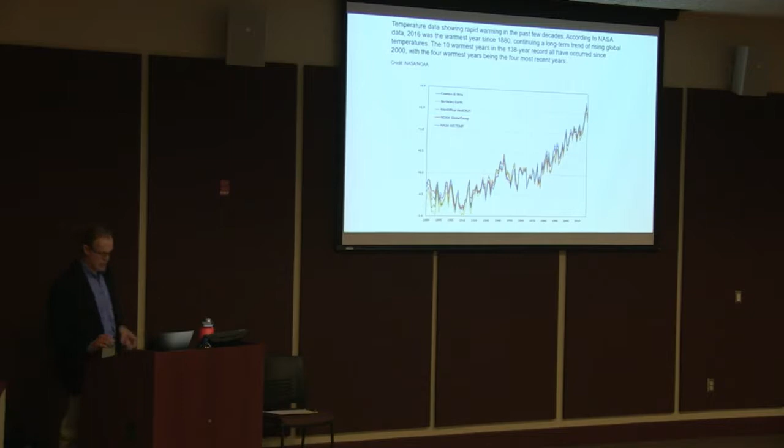This past November, Volume 2 of the 4th National Climate Assessment, called NCA4, was released by the United States Global Change Research Program. It focused on climate change, impacts, risks, and adaptations occurring in the United States. The report contains supporting evidence from 16 national level topic chapters, for example, water, oceans, energy, and human health, and 10 regional chapters and 2 chapters that focus on societal responses to climate change. The National Oceanic and Atmospheric Administration is one of 13 federal agencies that contributed significantly to the study.

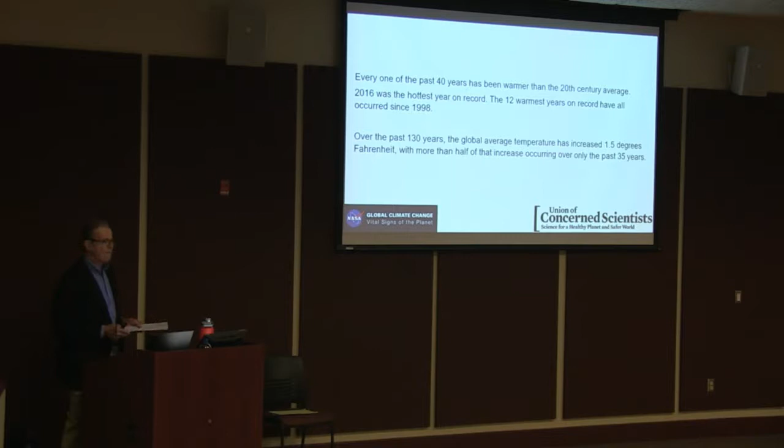In each of your packets, you should have received an additional resources page, and on the back of that page is a summary of the findings of the National Climate Assessment. And if you want to read the entire report, there is a link on there as well.

Ice losses from Antarctica have tripled since 2012, increasing global sea levels by 0.12 inches, which doesn't seem like a lot, but as I progress, I'll show you some examples where that is making a difference, and not in a good way.

This is an aerial photo taken in 2015 of a rift in the Larsen C Ice Shelf, which is the 4th largest ice shelf in Antarctica.

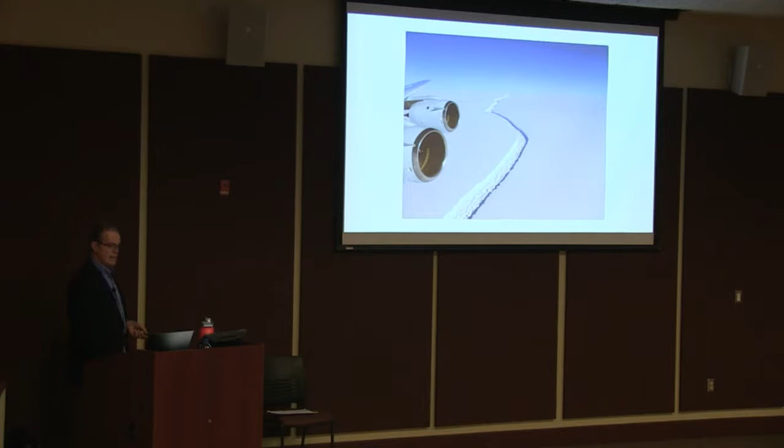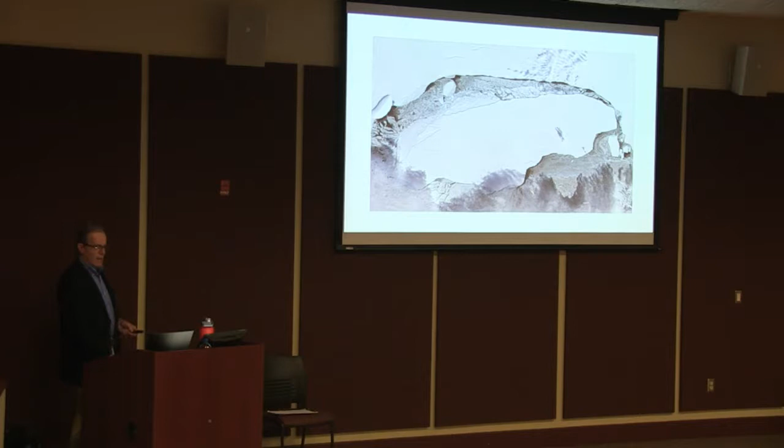Just 2 years later, in July of 2017, this section of 1,900 square miles, slightly larger than the state of Rhode Island, and 1,100 feet thick, broke completely off and separated entirely from the Larsen C Ice Shelf. It is now thought to be one of the largest icebergs ever.

Miami-Dade County, Florida. Sunny day flooding has become a regular occurrence in areas of Miami-Dade County. It's happening in other places too, like Charleston, South Carolina, and New York City.

This is not stormwater from a recent rainfall. This is seawater. It is corrosive, and it is causing damage to roadways, utilities, and it is contaminating the soil with salt water. It is having a negative impact on local economy and local businesses, and it's forcing kids to stay home from school.

So think of the Bay of Biscayne that borders all of Miami as a giant bathtub. It can only hold so much water. So during certain tidal events, water is being pushed up through the porous limestone because there's now an excess of water in the Bay of Biscayne.

That water is being pushed up through the porous limestone on which most of Miami is built, literally coming up through the ground and overwhelming storm drains.

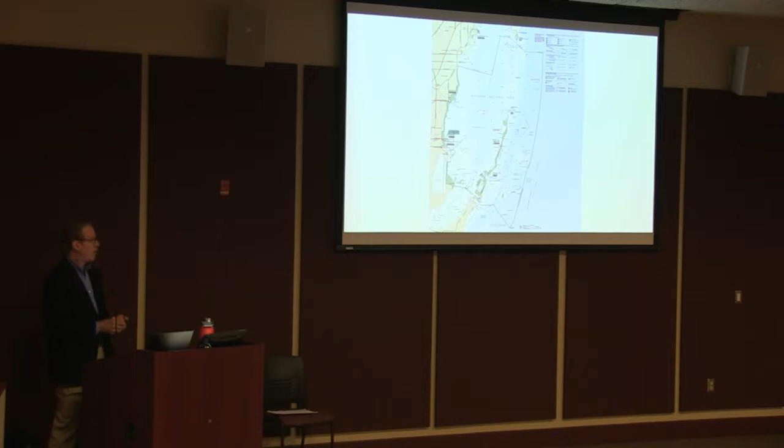So they've developed an ambitious, innovative, and extremely costly engineering effort to mitigate this problem. Over the course of the next 5 years or so, they're going to build 60 of these things in those low-lying areas that are prone to this sunny day flooding, to capture the water and pump it out before it builds up.

The problem is they're pumping it out in the ocean and it's just coming back in, eventually.

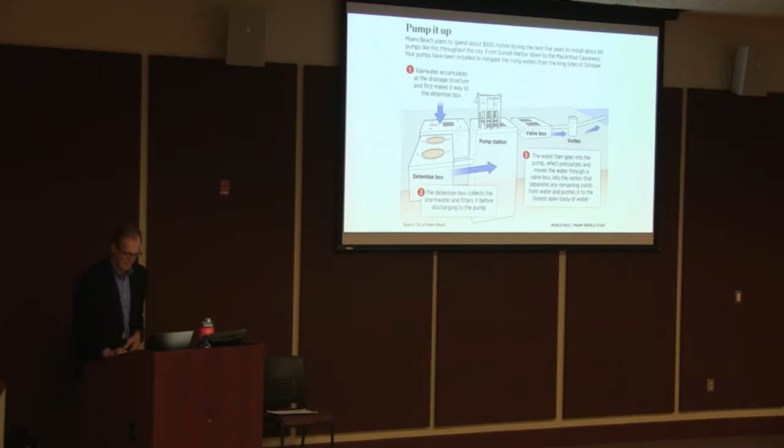This is Lake Austin in 2011. Austin, Texas. This is Lake Austin last November. In Austin, a major rainfall caused Lake Austin, Lake Travis, and Lady Bird Lake, the three main aquifers supplying the city of Austin with their water, to overflow their banks.

Stormwater runoff overwhelmed the lakes and dams, clogging their water treatment facility. This is actually silt. And this is obviously very silty too, but as it entered the water treatment plant, it completely clogged the facilities with silt.

Forcing a boil water mandate for a week, disrupting daily life and affecting countless businesses, bars, restaurants, University of Texas, and a lot of other entertainment venues.

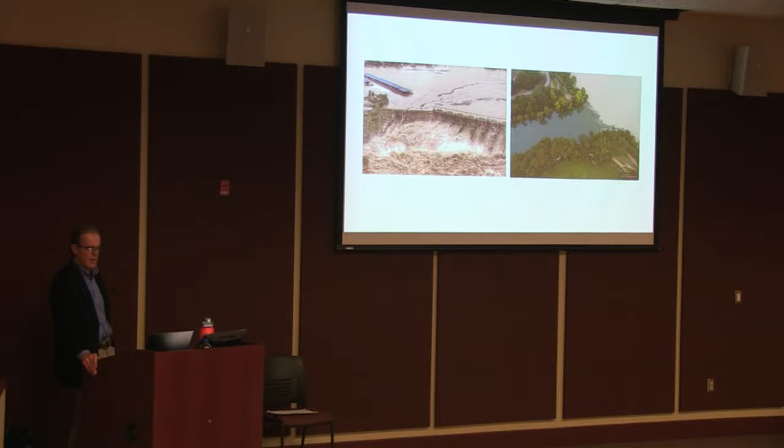Austin, Dallas, Houston, and many cities across the South have experienced double-digit growth in the past 2 decades. Stormwater runoff from overdevelopment is a significant source of flooding. Water infrastructure in growing communities simply can't keep up, and aging water infrastructure in older cities is crumbling.

The situation became so dire that the mayor of Cape Town initiated progressive levels of water rationing and was prepared to establish water rationing stations guarded by police and the military. Winter rainfall and the stringent rationing program that the citizens of Cape Town embraced averted potential disaster, but it still remains in crisis, a critical problem. They're not even up to close to half of their normal reservoir levels.

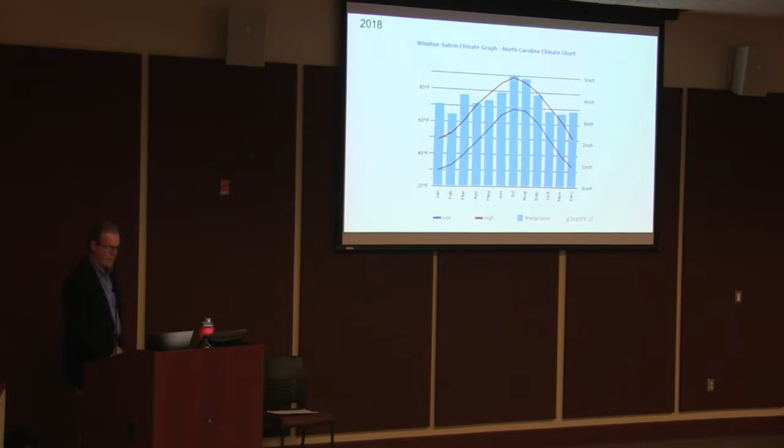However, in October of the same year, Stone Mountain Park opened Snow Mountain, a 400-foot tubing hill. They spent $5 million on this project, and on the first day, they blew 1.2 million gallons of water into the air, making artificial snow on an 80-degree day. Neither the snow nor Snow Mountain lasted very long.

In 2007, a theme park developer announced it was building an 80,000 square foot indoor water park, complete with a fly fishing pond, a sand beach, scuba diving and snorkeling lagoons, an indoor and outdoor wave pool, and a whitewater river for kayaking. 50 million gallons of water to initially fill it, and 60 to 100 million gallons of water per year to maintain it. It's crazy.

From 1895 to 2018, wildfires burned 35 million acres of land in California, which measures nearly 105 million acres. In the past 123 years, wildfires have burned the equivalent of 33% of the state of California. In the last two decades, 13% of the state has gone up in flames.

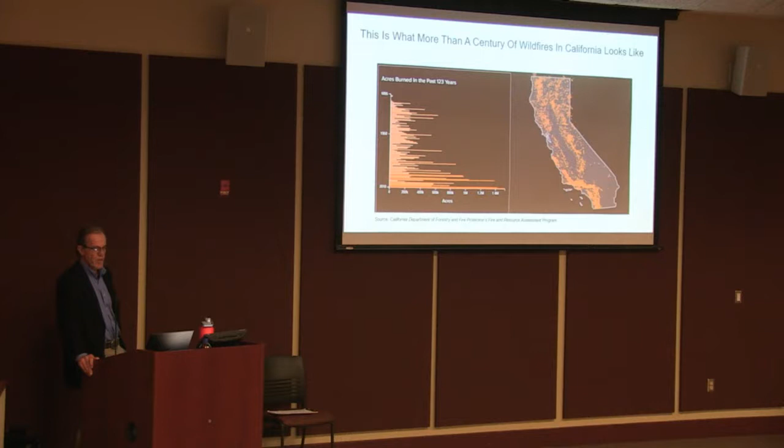Paradise, California, November 2018. This is the Camp Fire, described by many as a fire tornado, with high winds and incredibly hot fires.

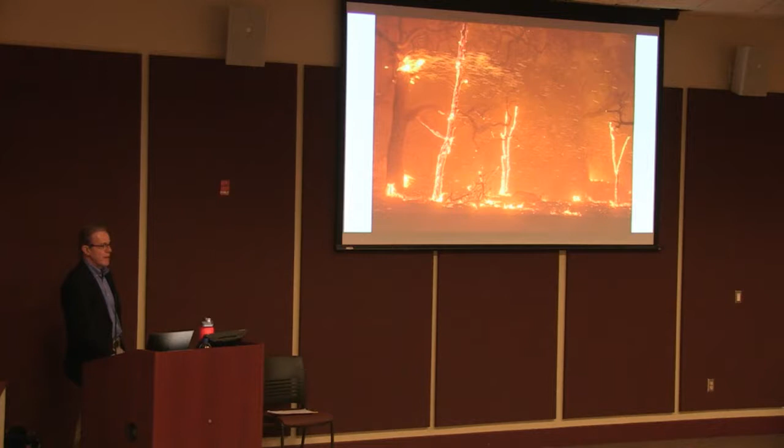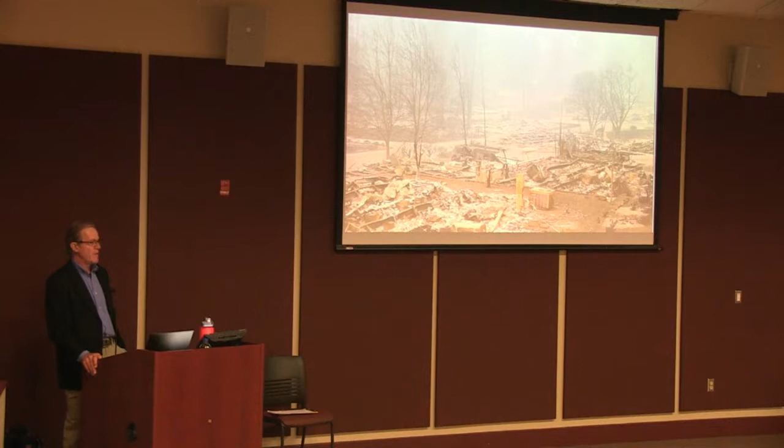90% of all the structures were destroyed in what was once called Paradise, a town of 26,000 residents. Everyone was affected, and almost everyone lost their homes and all their possessions. 86 people lost their lives.

So here's the hydrological cycle. We get rain, we complain about it, and we become apathetic when the sun comes out. And when it doesn't rain, we become aware, and then we become concerned, and then we panic, and the cycle continues.

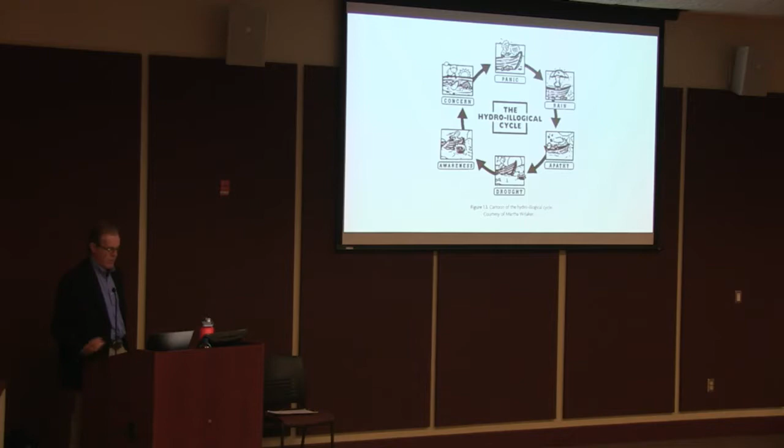So let's talk a lot about water infrastructure. With 71% of our planet made up of water, you'd think we'd have much more than we need. Of that water, though, only 2.5% is fresh water. And 5% of that 2.5% is actually in the Great Lakes, which, when I learned that, I was really surprised.

Anyway, of the 2.5% of fresh water on the planet, two-thirds is locked in ice caps and glaciers. Less than 0.3% of total fresh water on Earth is in liquid form on the surface of the Earth. The remainder is in permafrost, ground moisture, the bodies of plants and animals, and the atmosphere as vapor.

So when we understand how much fresh water is available to us, and in particular, clean, healthy water, it is literally a drop in a very large bucket.

So this is kind of fun. If you had a 10,000-gallon swimming pool in Winston-Salem, and you wanted to fill it with water, it would cost about $60. If you fill that same pool with bottled water from the grocery store, $10,000. $23,700 to fill it with soda, $35,000 to fill it with milk, $40,000 to fill it with gasoline, $100,000 to fill it with bottled beer, and $320,000 to fill it with one of our favorite brand name coffees.

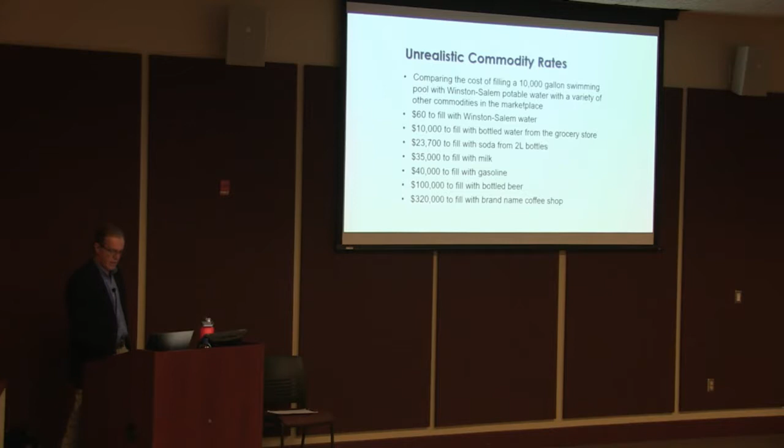And $2,200 to fill it with 40-pound bags of topsoil from Home Depot. Proof positive that water is in fact cheaper than dirt.

Yet with what seems to be an abundance of water, over 1 million people have to walk at least a mile each day to get their water for hydration, cooking, cleaning, and bathing. And many more millions have inadequate access to clean water.

Here in America and most other prosperous nations, we take it for granted that whenever we turn on our faucets, clean, healthy water will flow freely. And it's dirt cheap. My God, we even flush our toilets with drinking water. That's insane. We waste a lot of water.

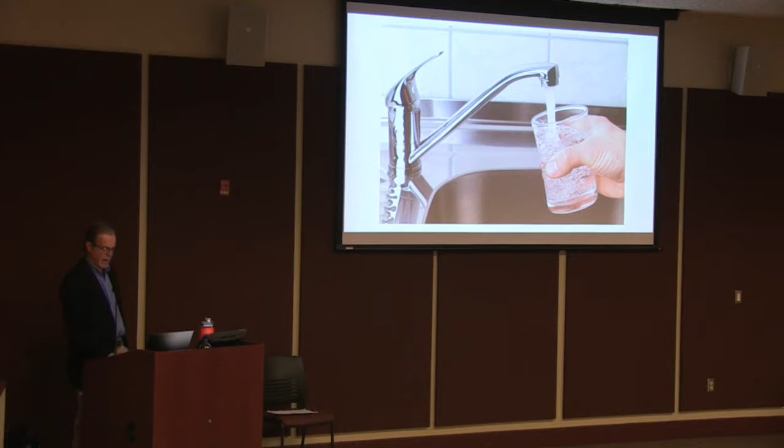So if you had a dripping faucet that dripped once every 10 seconds, over the course of a year you would lose 219 gallons of water. There's a high-end manufacturer of shower fixtures that offers a custom body spa, 10-jet shower tower that delivers 80 gallons of water per minute. That's enough to fill a common household bathtub in 1 minute. Crazy.

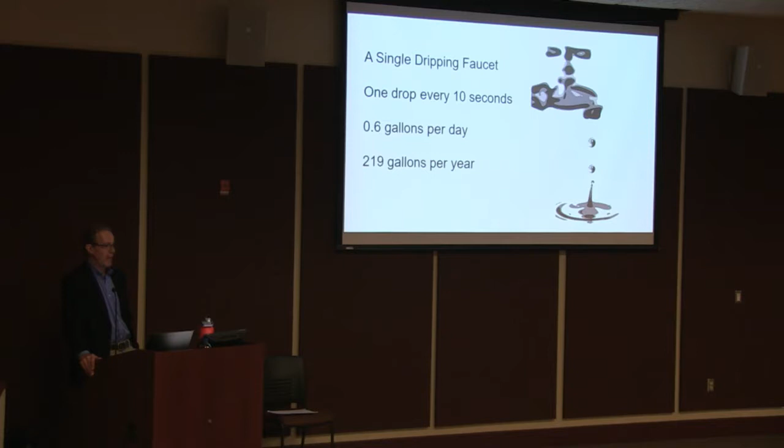So this is very common too. You would notice it if it was in your house, because like my mom's house, you would see water pooling up on the floor. But you wouldn't notice if it was the pipe leading to your house underground, or the pipe running down the street. But even a 1/32 of an inch pinhole over the course of a year, or three months, would, under pressure—60 psi being pretty much normal household pressure—waste 18,500 gallons.

Now imagine if that was an 18-inch water main running down your street at 150 psi, which is the normal operating pressure for most municipal water systems. You can pretty much triple those figures. By the way, leaking toilets are the primary source of residential water loss.

So there's a very simple way, if you're a homeowner and you have access to your water meter, which you should: make sure all your faucets are turned off and look at your water meter for 30 seconds to a minute. And if it moves at all, something's leaking. It could be the pipe from the meter to the house, or it could be something in your house.

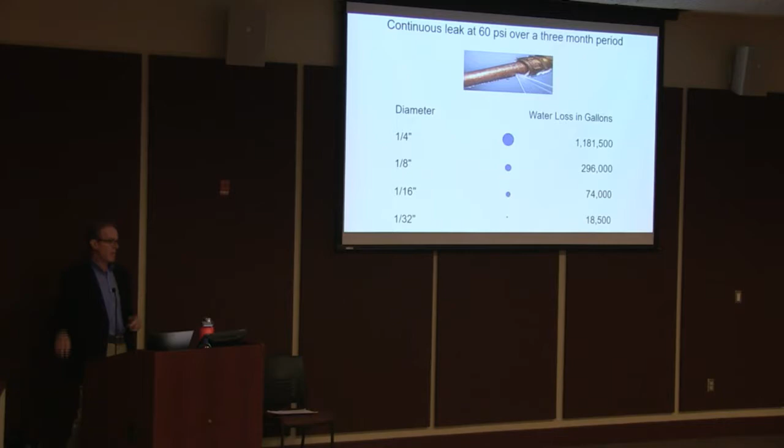This is a little off topic, but we take for granted how much water it takes in the aggregate process of making common everyday things we use or consume. It takes 3 gallons of water to produce a single sheet of paper, when you account for the rain, machinery, processing, and washing involved.

It takes 35 gallons to produce a cup of coffee, and 100 gallons to produce a potato. That may seem far-fetched, but it comes from a reliable source, the U.S. Department of the Interior. It takes 1,000 gallons to produce a pound of beef, when you account for all the water the cow drinks, the water that grows its food, and the processing of the meat.

This is an interesting calculator provided by the AWWA, the American Water Works Association. I plugged in Winston-Salem's approximate population for 2018. With conventional plumbing pipe transfer methods, PVC and ductile iron, the primary methods of water transfer in Winston-Salem's streets, between 29 and 32 million gallons of water are lost over the course of a year. Projected long-term, that's 1.6 billion gallons lost over 50 years.

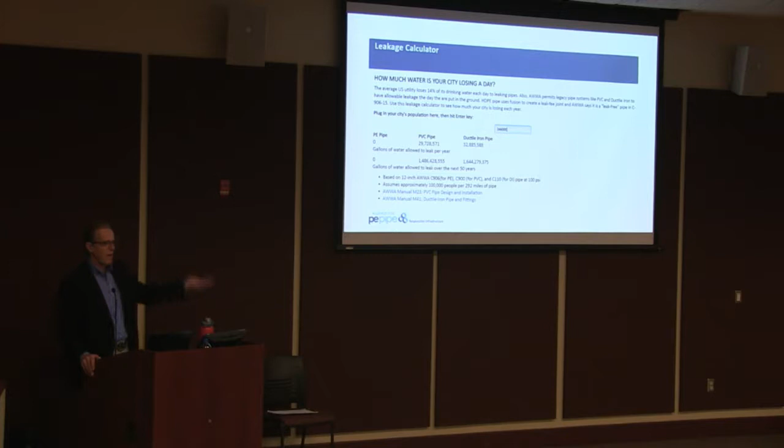At the UCLA campus in July 2014, a 30-inch, 90-year-old water main broke. Water pipe breaks and leaks occur several times a day in LA, a big city, and probably daily here too. But the UCLA break was extreme in part because of the line that pulls water down from the Stone Canyon Reservoir. When the line broke, water geysered at a rate of 75,000 gallons a minute, and over several hours they lost 15 million gallons of water.

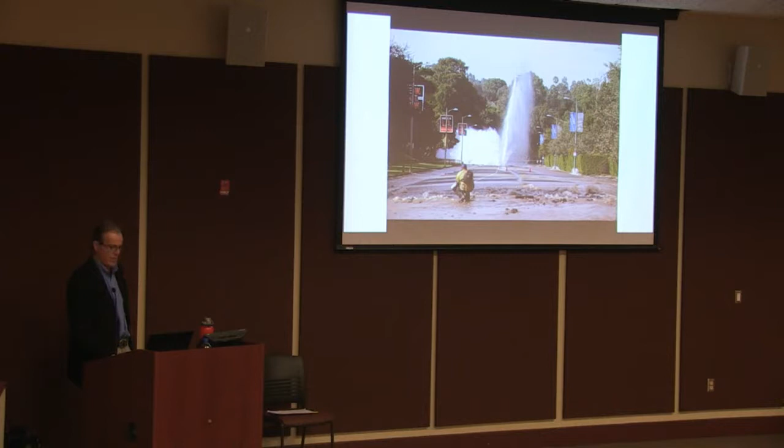This is the athletic complex that had been newly renovated. According to the LA Times, utility officials had warned in 2012 that 1 million feet of pipeline, or 20% of their system, had been in service for over 100 years and needed to be replaced. So the city, like many cities, is currently and very slowly swapping out the old lines, but at the current pace it will take at least 100 years to replace the entire system.

These are students being evacuated, and if you look, this is water cascading down a stairway, not a water feature. Department of Water and Power officials had hoped to secure a 5% water rate increase to fund infrastructure improvements, but the plan was dropped. The city of LA had to deploy swift water rescue teams and scuba gear into below-grade parking structures to make sure nobody was trapped in their car, since the cars were completely submerged.

Because of regular drought, Department of Water and Power customers have experienced an average 45% increase in overall water rates since 2012, but nearly all of the additional money is going toward purchasing water, not fixing pipes.

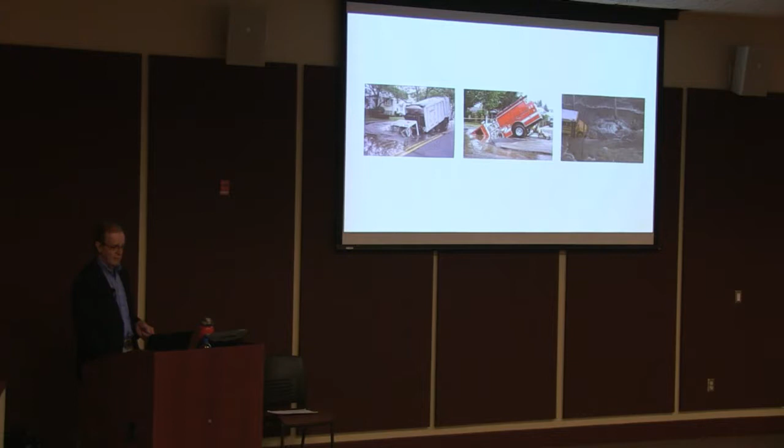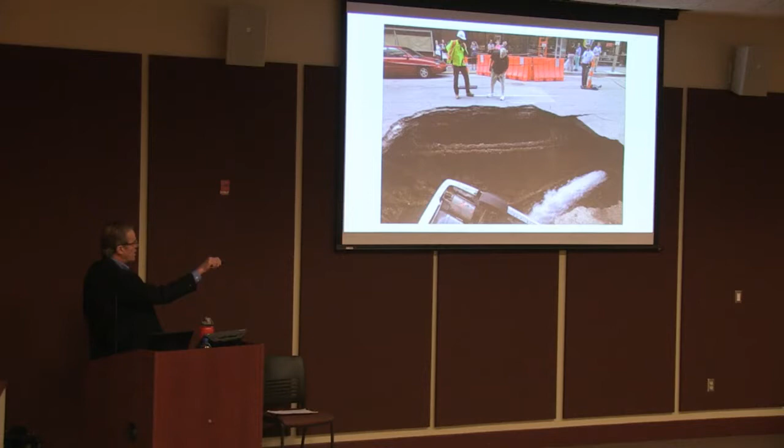We don't think so much about a garbage truck falling into a sinkhole. A fire truck would be bad, but a school bus would be really bad. This guy and his wife went to their health club on a Saturday morning in St. Louis, Missouri, parked their car on the street, and came back to find a water main leak had completely undermined the soil underneath the road—their car was now literally sinking into it.

So academics, scientists, municipal authorities, and engineers are regularly conspiring to come up with new sources of water. New dams, really expensive, and you displace a lot of people, flood a lot of land. River sharing, not really sure how effective that is, or even what it is. Rainwater harvesting, ambitious, good thing.

Think of new development, even existing shopping malls and strip malls. How much roofing there is at a Walmart and how much parking lot there is. That water's all going down the drain. It could be captured and used at least for irrigation or for flushing toilets.

Gray water is water that can be reused that's not pure. For example, if you had a gray water reclamation tank, a pump, and a filter at your home—this is really common in Texas now because of the drought—they collect that water and it filters through silt or diatomaceous earth. So it comes out clear, it's just not pure. You wouldn't want to drink it, but you can use it for flushing the toilet.

So the last one, icebergs. They were literally contemplating towing icebergs to help alleviate the drought situation in Cape Town, South Africa.

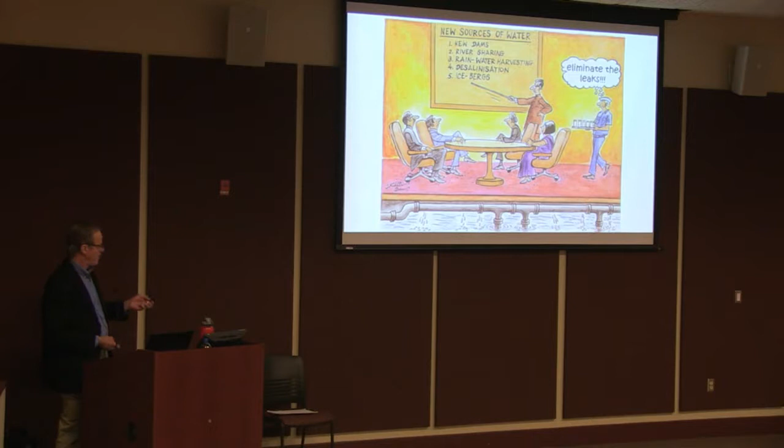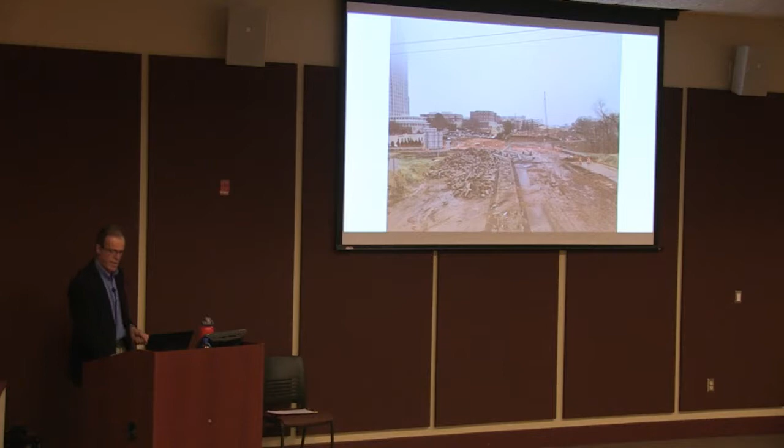Aging infrastructure right here in Winston-Salem. That, for those of you who haven't been around downtown lately, is Business 40. See the Wachovia building on the left. And a long overdue makeover for Business 40.

So I'm going to talk a little bit about materials. The evolution of water transfer started in ancient Rome, where they built aqueducts, canals, and even plumbing systems made of lead pipe, run through trenches, and that evolved to wood pipe. We've actually seen wood pipe excavated from areas in Washington, D.C., and it was very common in the early to mid-1800s.

It's basically like a barrel that's cylindrical. Clay was also really common up until about the early 1900s, maybe 1920s—very cheap, abundant, but also extremely brittle, and it comes apart.

Then cast iron, after the Industrial Revolution, became a big deal. Spun cast iron was even better.

Up until about 1970, asbestos cement pipe was very commonly used, mostly on the wastewater side, but also in drinking water. When the asbestos exposure issue became a big deal, everybody kind of freaked out. Asbestos in pipe, if there's drinking water running through it, isn't really an issue—it's only an issue when it's what's called a friable material. So if you crush it, it releases powder into the air, and if you breathe that in, that's a problem. But the EPA and the FDA said no more asbestos cement pipe. There's still a ton of it in the ground, though.

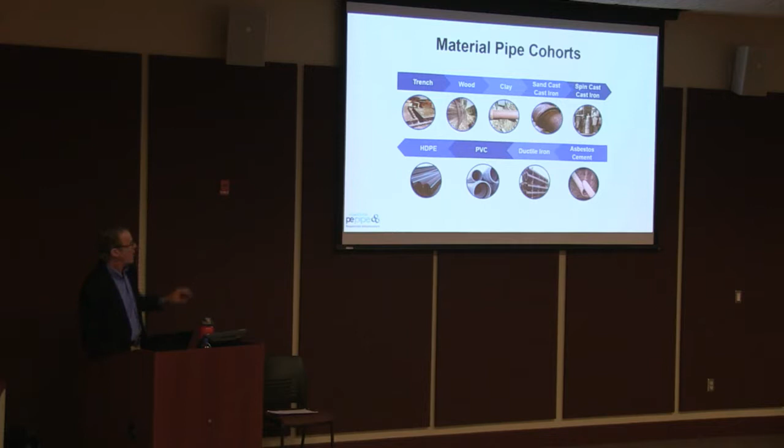So all the other pipes we just looked at are known as bell and spigot. There's a bell, so a wide end on one end of the pipe and a narrow end on the other, and they come together and are pressed together. There's either an internal seal in there, or they're glued, or they're packed with something called oakum.

In the olden days, cast iron and a lot of ductile iron pipe was packed with oakum. The problem is that when those pipes are pressurized, eventually over long periods of time, that sealant gets blown out.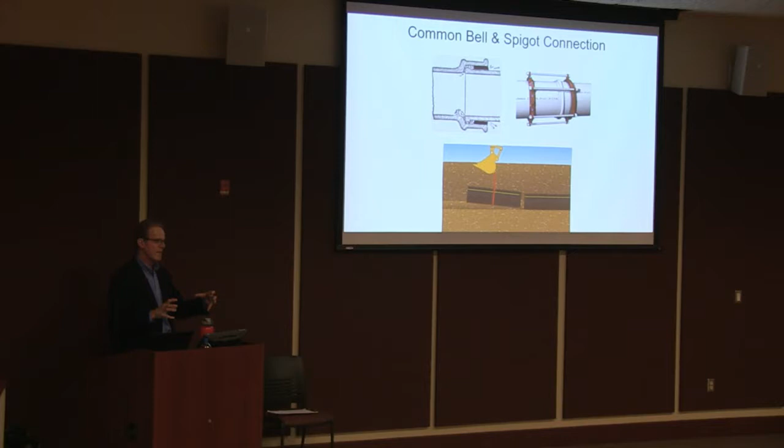The other thing too is with any kind of bell and spigot installation—whether it's cast iron, ductile iron, PVC, or cement pipe—it's put together in the trench. You see these gigantic pieces of cement pipe, primarily used for wastewater, that weigh over 1,000 pounds. You get them down in a trench and have to push them together. There's going to be dirt, rock, and gravel that gets in, so they're never going to properly seal. And over time, with shifting soil, they can pull apart and start leaking. And then cars start falling into the street.

By the way, this pipe in particular was a water main - when you opened your tap, that water was coming out of it.

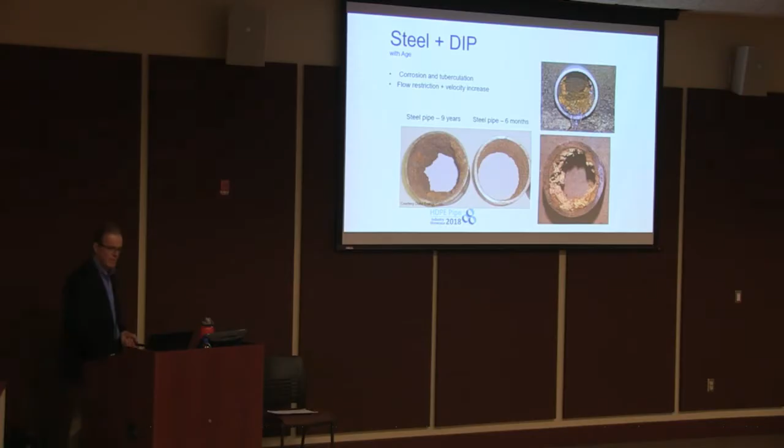So this pipe on top was excavated in East Windsor, New Jersey, near Princeton. It had been in the ground for 10 years. That's ductile iron pipe. Now, there's nothing wrong with ductile iron, but when you bury it in the ground, especially in corrosive soil, this can happen in 10 years. Plus, any iron or steel pipe will corrode and rust from the inside out and from the outside in.

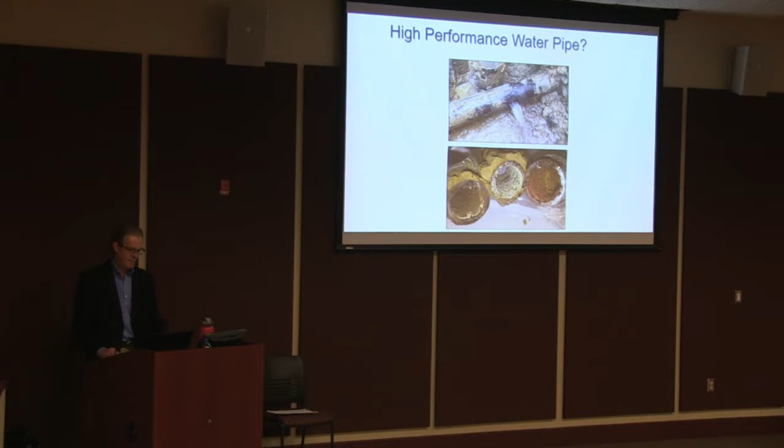Which is the ability to withstand ground movement from freeze-thaw cycles like we get in northern climates and in the Arctic, and shifting soil conditions due to drought and flooding, and earthquakes.

I know in the Houston area, they went for about 4 years into extreme drought, where they were having maybe 3 to 4 inches a year of rain. So the soil became like concrete.

And then in the spring of 2016, they had what's known as a 500-year flood event, the kind of flood that would only happen once every 500 years. It had 24 inches of rain in 36 hours. And it overwhelmed their sewer system and the stormwater drainage system. But eventually, all that water did seep into the soil, so that concrete soil became sand.

And all those pipes in their water system, both water mains and sewer lines, broke apart - thousands of them. They're replacing 50 miles of pipe in their municipal water system every year. 50 miles.

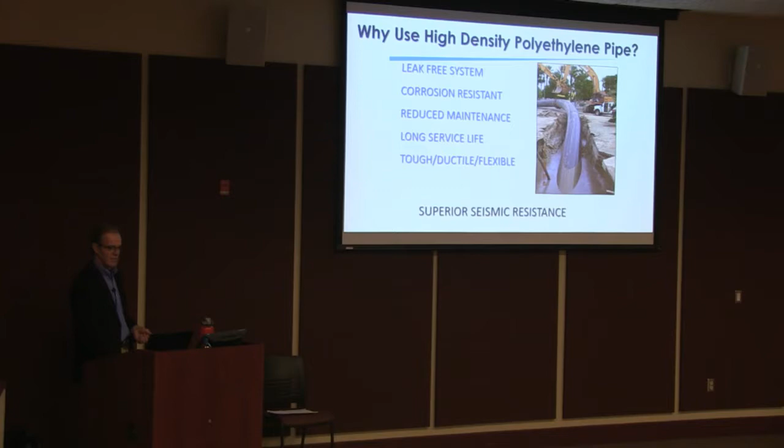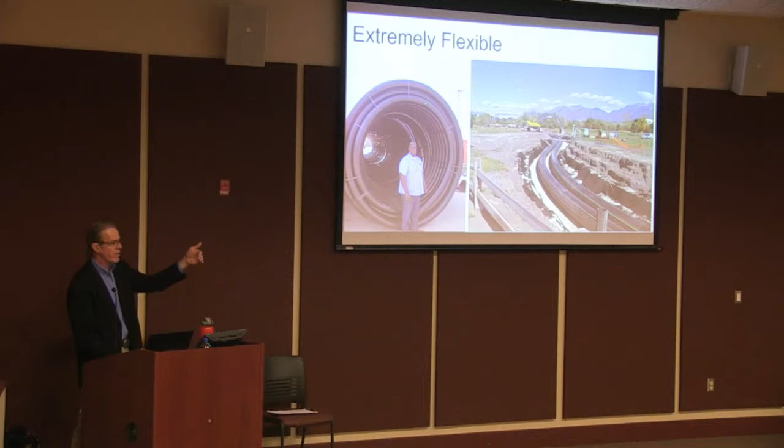So when the pipe is made, it has memory, and it can be bent around corners. In conventional materials like ductile iron or PVC, you would have to put 20 degree, 30 degree, or 45 degree connectors in that trench.

When a water main is leaking, even at a slow rate or a rapid rate, it's not a good thing, but ultimately it's going to undermine the street and need to be repaired. But when there's a gas main leak, people can die. So they carry these things on their truck - it's hydraulic, basically a pincher. It's like taking a vice grip wrench on a garden hose, completely stopping that flow of gas immediately, fixing the breach, and then they bring that up real slow, and the pipe comes back to its normal shape.

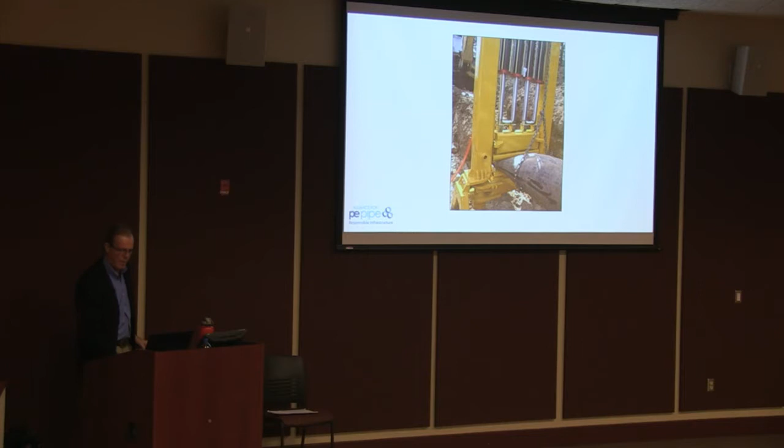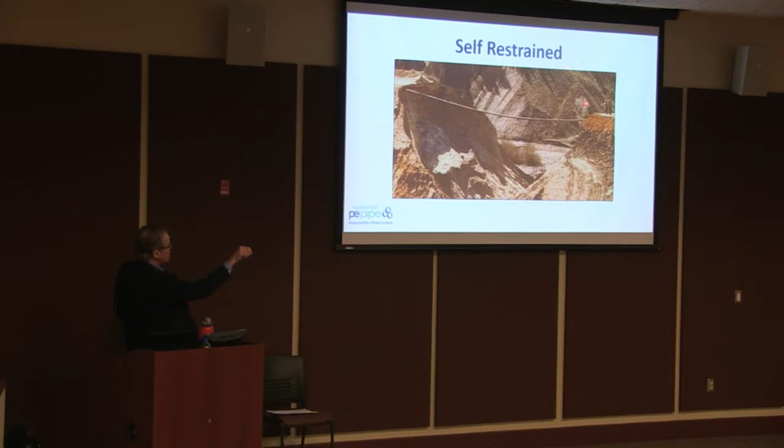So this is a mass wasting at a copper mine in Utah. Several thousand tons of earth washed away in a matter of seconds. You can see the river over here - so this was all earth. And there was an 18-inch fire line about 36 inches deep, buried underground. And when that mass wasting occurred, you can see two guys standing up here - the line did not fail, and it was still carrying water.

Now, you wouldn't want to leave it that way, but it's a really good example of the resiliency and strength of this material.

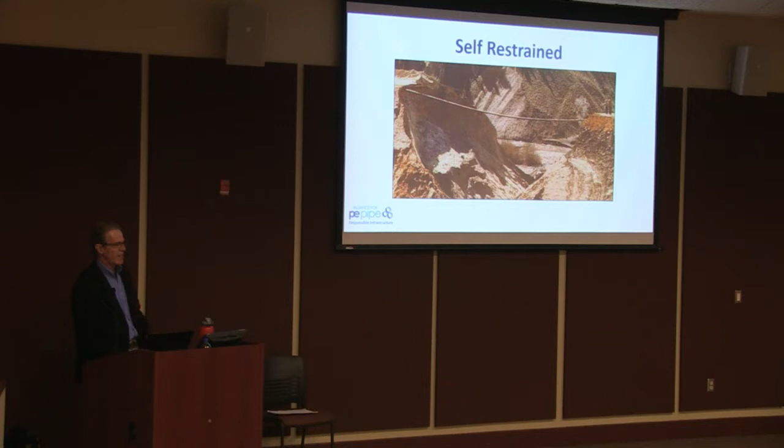We use high density, medium density, and low density polyethylene in our daily lives - milk containers, juice bottles, yogurt containers, detergent and bleach bottles. It's all made of polyethylene. So it's safe, and it's approved by the FDA, the National Sanitation Foundation, American Society of Testing and Materials. It's safe. We use it every day.

NSF 61 is the toxicological standard that's established for all pipes and water transfer systems for drinking water. Go to Home Depot and buy muriatic acid, Drano - highly corrosive, highly caustic liquids - it's sold in polyethylene. Again, testament to the fact that it doesn't corrode, and you're not going to have an issue with it when you're running water through pipes that are sometimes 3 inches thick.

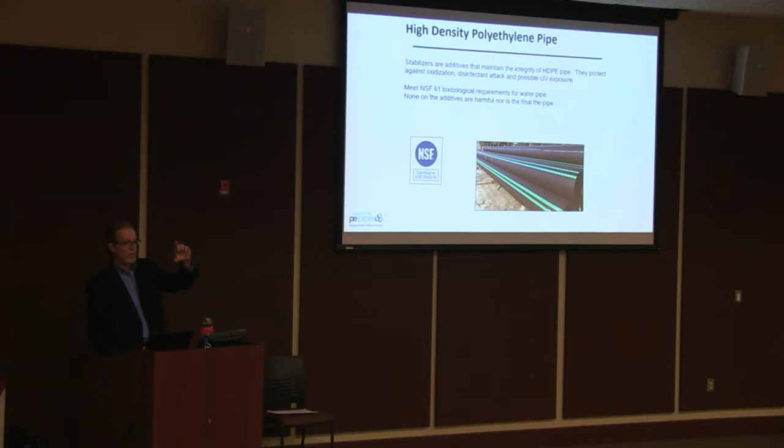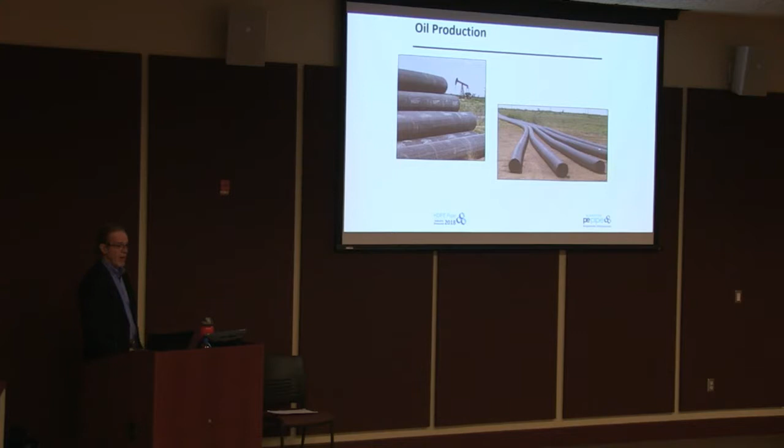So here's some applications. Nuclear, again, it doesn't leak, it doesn't break, and that's a huge issue in many industries, particularly nuclear. Oil production, because a lot of times when they're at the oil fields, they can just lay the pipe out on the ground and then move it, drag it to another spot. Mining, very commonly used in mining now, again, mostly because it's flexible.

Marine applications, this is really cool. So the picture on the left, that's an example of at the Nashville Airport, Cornell University, Boise, Idaho, and several other cities around the country are submerging polyethylene pipe into the bottom of lakes. So you get below maybe 15 feet, and the water's about 50 degrees, between 40 and 50 degrees. And they're pulling, Toronto's doing it too. They're pulling that cold water through heat exchangers, basically a giant radiator that you would see on a truck. So it's got a series of tubes and a fan, and they're blowing it into buildings to air condition. They're doing it at about half the cost of just regular HVAC systems that run on electricity.

This other picture, you can't really tell very much, and I'd love to go into more detail about it, but I don't have enough time. This is part of the ocean cleanup project. Has anybody heard about that or seen it? All right, so they're taking a 36-inch, Sean, you have. They're taking, I think it's a 36-inch or 48-inch, about a 2,000-foot long piece of high-density polyethylene pipe that has a drape hanging from it. And I'm not sure, it's some kind of a super strong plastic curtain that extends down about 9 meters, I think. And because of the way they've designed it, it goes into a natural horseshoe, and their objective is to take it out to the North Pacific subtropical gyre, which is the garbage patch, which is a topic for another discussion. I could spend all day talking about that because I've studied it.

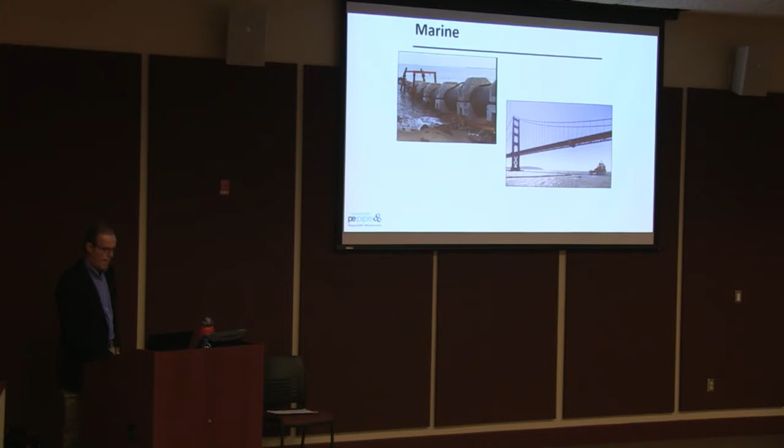Yeah, they're using high-density polyethylene pipe. Both ends are sealed, so it floats. But even if the ends weren't sealed, it still floats. So that's why they have to put those concrete collars on it for the shore projects. Landfill, great application for it as well because it lasts indefinitely, flexible, non-corrosive, and it's easy to move around if they need to.

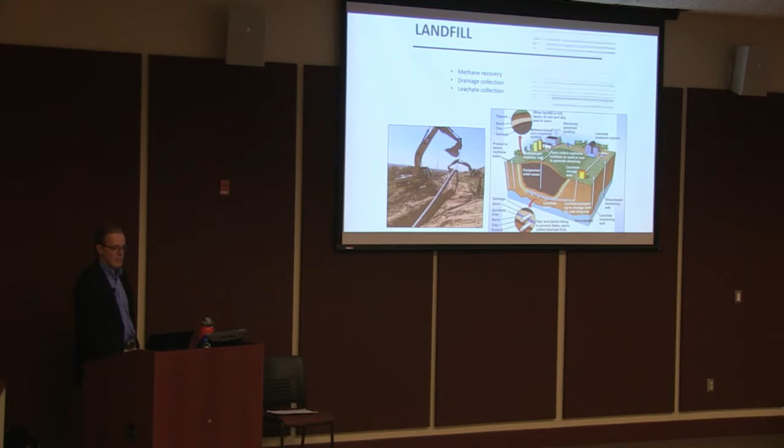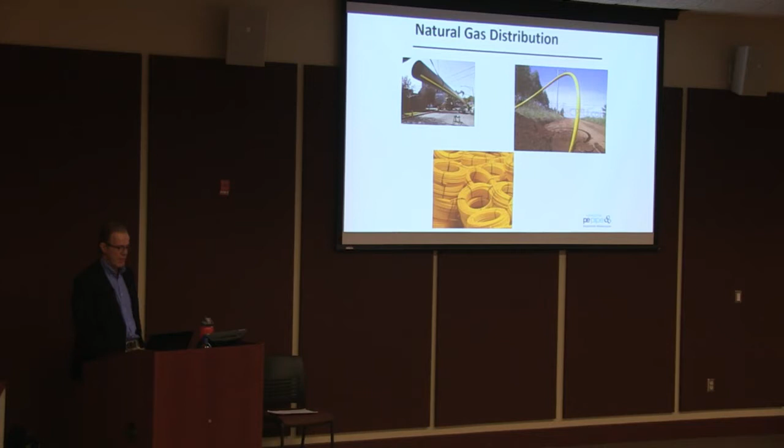Industry, natural gas is the standard now. Most natural gas companies and installers don't use anything but polyethylene pipe. This is actually medium density, but again, as I explained before, it doesn't leak, so it's not going to blow up. Water, of course, wastewater.

Google, Apple, Tesla have all used high-density polyethylene pipe to build their new campuses. So if you've seen these campuses, they're huge. So all their water mains and water supply are now using high-density polyethylene pipe. Again, it doesn't leak.

So this is cool. There's a brewery in Belgium where they had to transport 12,000 bottles per minute of beer via trucks. Their production facility was producing 12,000 bottles per minute. They had to transfer that beer from the brewery to the bottling plant, and they were running over the streets of this town, the ancient cobblestone streets, and tearing up the roads. And the mayor didn't like that, so they built a beer main. I'll show you in a minute how they do that without digging up the street.

So this just shows you how the pipe is made. It's called extrusion, molten resin that's highly engineered specifically for high-density polyethylene pipe. It's pushed through a die in molten form, and then it goes through a series of chambers that are internal vacuum systems that keep the pipe from collapsing on itself. And these larger diameters, they run 50 feet just because they can't be longer for transit purposes to put on a truck. But you saw that picture of the guy earlier, 500-foot rolls of 6-inch and 1,000-foot rolls of 2-inch.

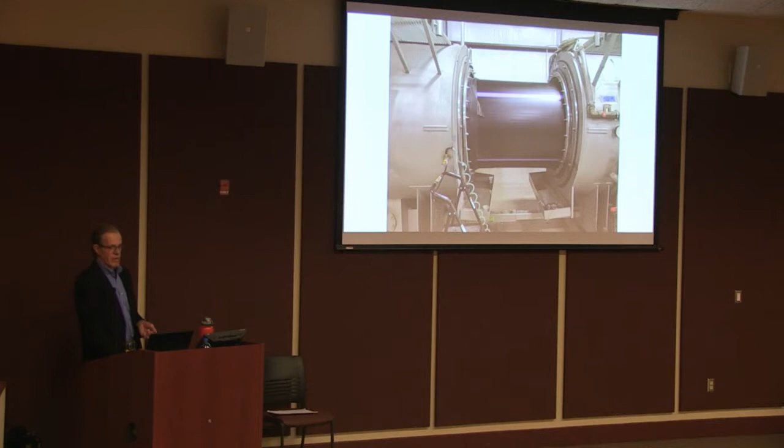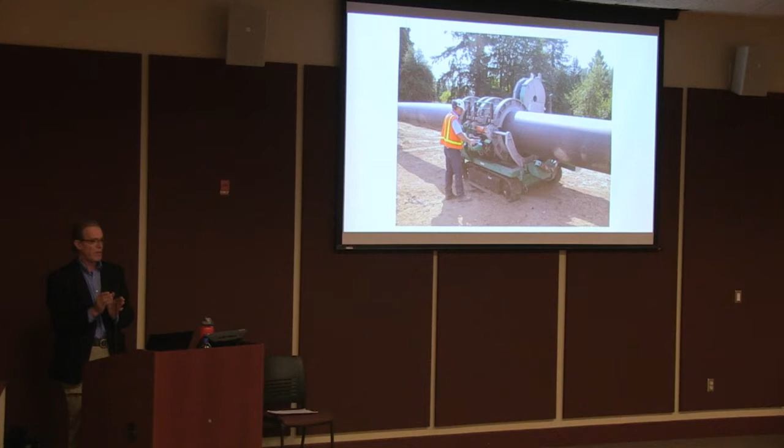So the process then is the pipe is put into this machine. It's clamped in. This plate lowers down, and it has blades on both sides. It cleans the ends of the pipe and squares them up, and that's pulled back. And then there's another plate that's a heater plate. Heats the ends of the pipes to 420 degrees, and then they're pressed together under pressure, like so.

Whoops. Doesn't want me to play it. There we go.

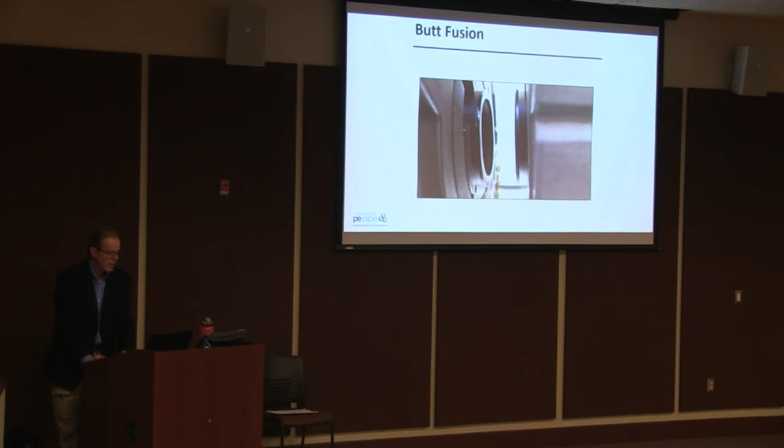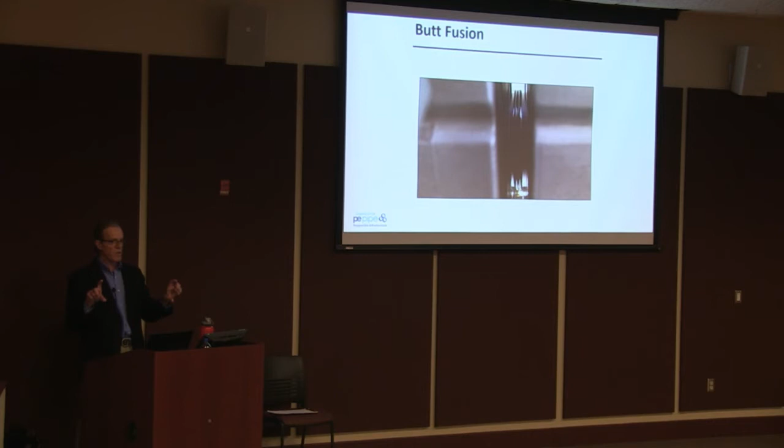So you see that? Those two molten ends of the pipe pressed together under pressure, that is now one continuous piece of pipe. The bond, the weld if you want, it's not really a joint, it's not a seam. The molecular structure of that pipe when it's extruded is kind of like an intertwined spiderweb, but when it gets pressed together, it's even stronger at the weld. They do a lot of testing with that.

That process is really common, it's called butt fusion, you're butting up two ends of the pipe. This is Electro Fusion, used primarily for repair. This is an Electro Fusion coupling, and here's a cross-section of it. It's embedded with copper wires. They connect the electrodes and zap it with voltage that heats up the copper wires, and it literally melts the coupling and the pipe together. It's just as strong as a regular weld.

So here are some methods that explain why high-density polyethylene is a superior product. Directional drilling is very common, where they literally drill under a riverbed or a creek bed, hook up the pipe, and pull it back through. You can't do that even with PVC.

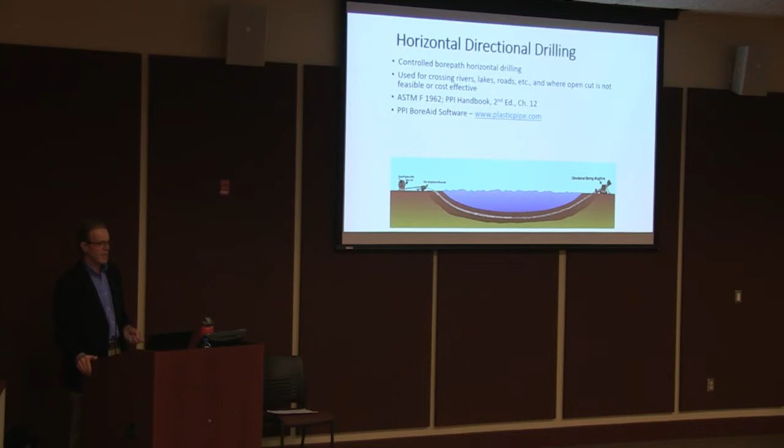Slip lining is really simple. It's basically taking a new pipe and pulling it through an old pipe. The old pipe still has to be cleaned out, there's a giant pipe cleaner that reams out the inside, and then you pull the new pipe inside. That's great for areas where you don't have to upsize, or you don't have a community downstream that's growing.

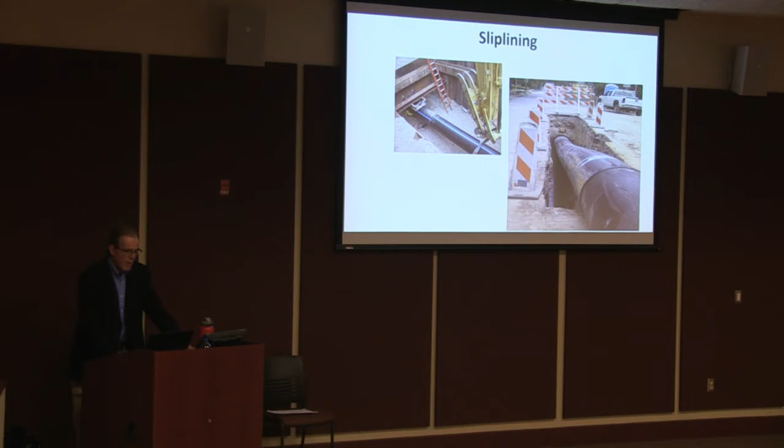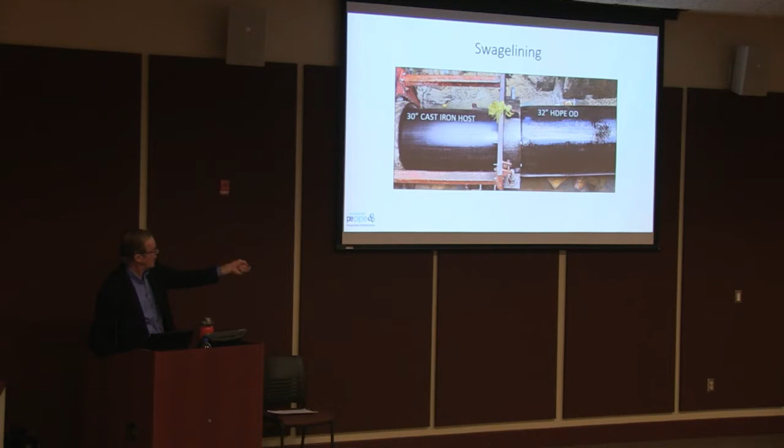But if you do have that growth, swage lining is another really interesting process. It's not as common, but you're basically taking a 30-inch host pipe, an existing old cast iron pipe, and reaming it out. This is a 32-inch brand new high-density polyethylene pipe that's been sprayed with vegetable oil. It goes through this die, which squeezes the pipe, pulls it through the die and into the host pipe. Once the tension is released from that pulling process, this pipe will form completely inside the host pipe with no annulus whatsoever. There's an advantage to this too, because you now have a pipe that will last indefinitely inside a pipe that's helping to shield it.

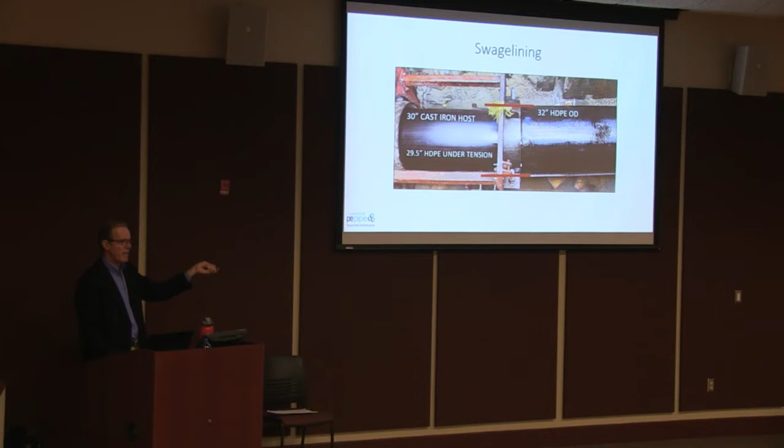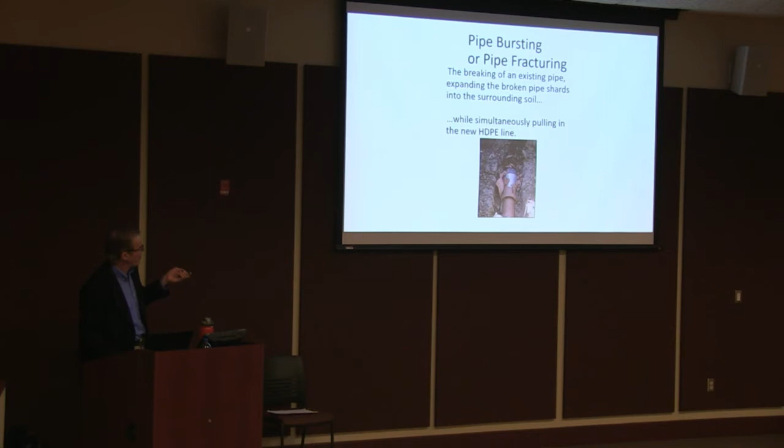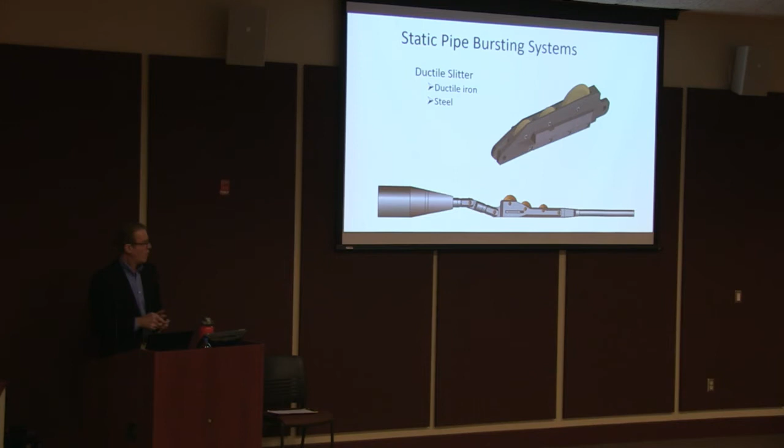Pipe bursting, or pipe fracturing, is also really common, though most people have never heard of it. It's the breaking of an existing pipe, expanding the broken shards into the surrounding soil while pulling the new pipe in. It's called a ductile slitter. This is pulled through the existing old host pipe, these slitters split it open, the expander head breaks it open even more, and the new pipe behind is pulled through. This can be done with any existing pipe: cast iron, clay tile, PVC, concrete, reinforced concrete, ductile iron, even steel.

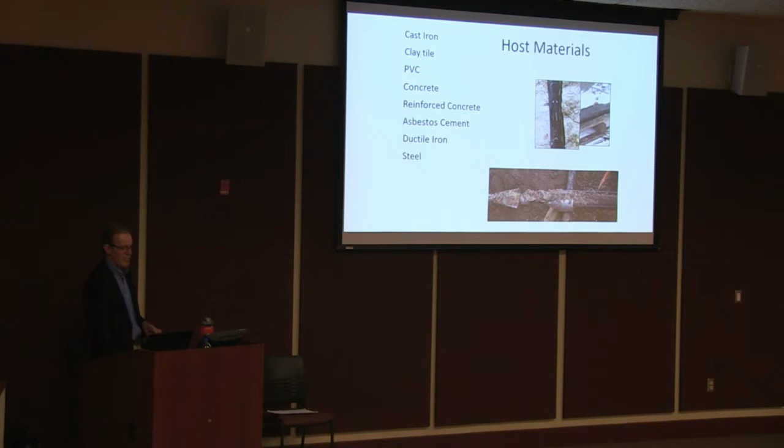Depending on the host pipe and the diameter, you need different equipment. They have generators and winches that go up to almost 200-ton pulling power. In this next picture, this is a 36-inch line going into an 18-inch existing pipe using pipe bursting. They're literally pulling the new pipe into the old pipe and breaking that open, expanding the ground, because they needed to upsize. There's a community downstream that's growing, and the existing system couldn't keep up with demand.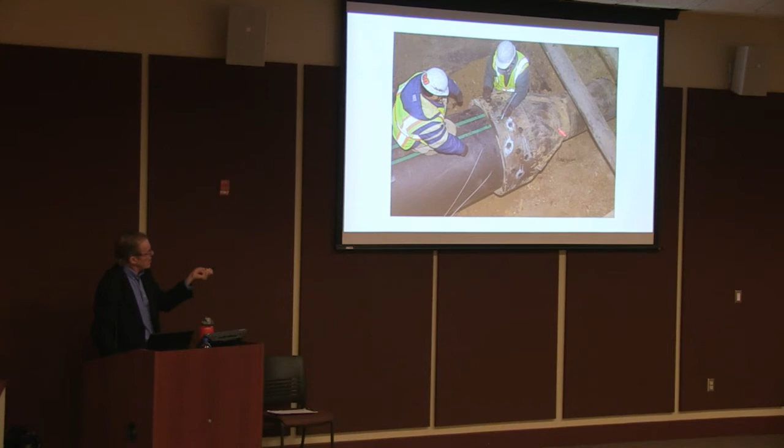The other thing about pipe bursting is that typically 80% of the installation happens below ground. So you're not closing roads, not disrupting neighborhoods, not killing trees. There's basically an entrance pit and an exit pit, and if there are any service connections along the line, those have to be replaced, but those require maybe just a 4-foot by 4-foot trench.

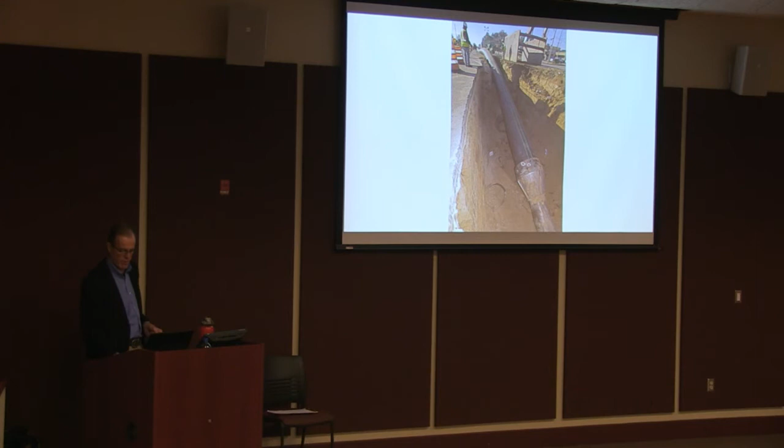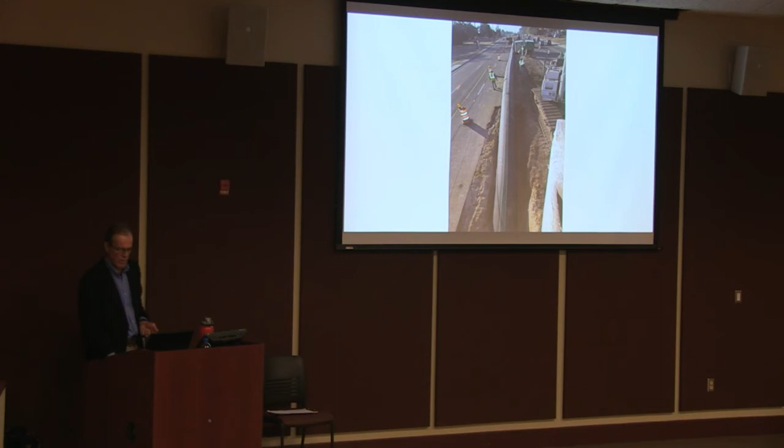So what happens is they use that fusion machine to string out a long length of pipe. They did a project in Miami-Dade, Florida, right down the middle of a busy street, similar to this project, in the city while traffic was still flowing. You see the cars, they basically did it down the median. This is an example of a high-powered winch, and there are rods that they shuttle down the existing pipe, and then this winch pulls the whole thing back into the exit pit.

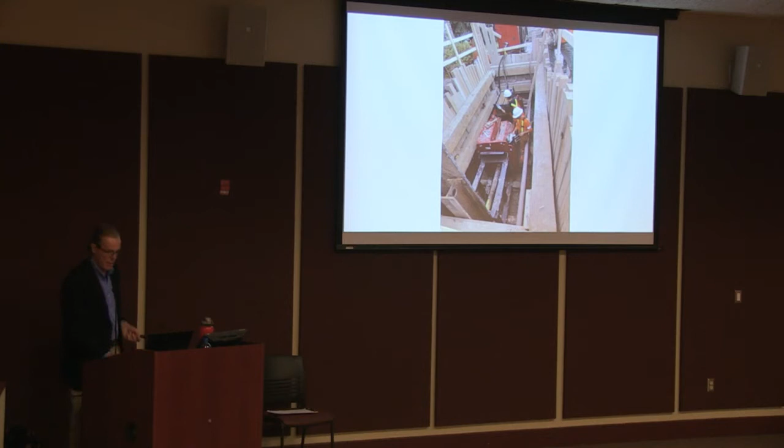I won't bore you with standards and so forth, but high-density polyethylene pipe meets or exceeds all standards created by the American Waterworks Association, the National Sanitation Foundation, ASTM, and any Canadian version, any of the requirements for any other type of pipe. High-density polyethylene meets or exceeds those standards.

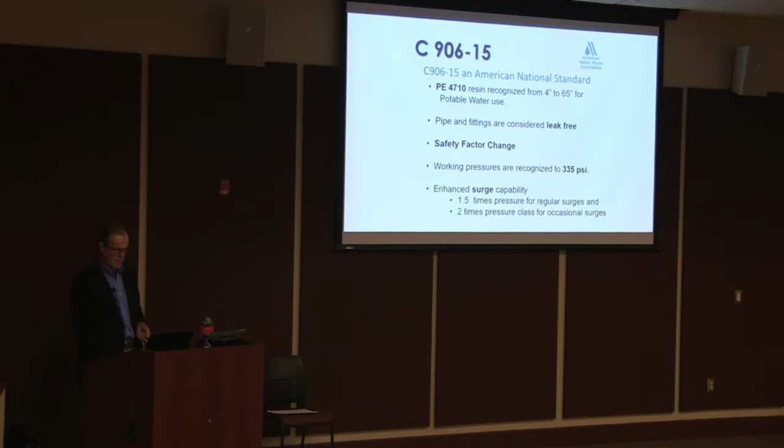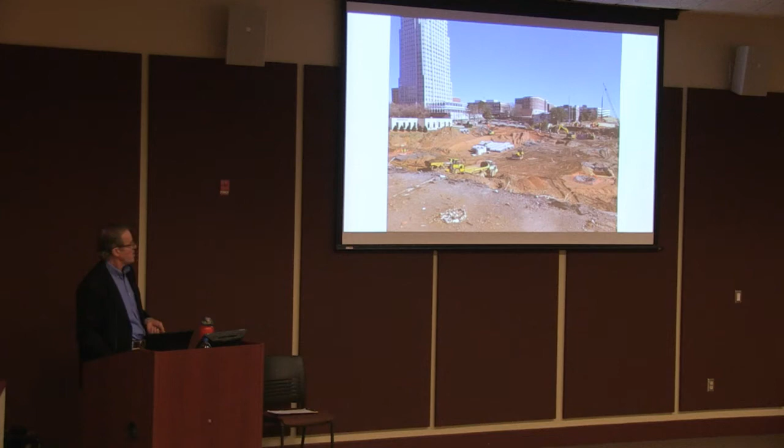So, as the infrastructure renovation continues in Winston-Salem, I'm driving around and I'm seeing a lot of concrete pipe, a lot of steel pipe. Why are they using it?

Some might argue that in certain applications, high-density polyethylene pipe is a little bit more expensive when you compare the cost of the material side by side, especially if you're doing a side-by-side comparison with PVC and high-density polyethylene pipe. When you take into consideration—

that pipe can be strung out if it's a new application, like down the side of Business 40, that pipe can be strung out over several miles. The trencher comes along, digs a trench a few inches wider than the pipe, and they just roll it in. They don't have to have trench boxes and like 6 guys in a pit moving the trench boxes every 12 feet.

So the installation cost is half. And given the longevity of the pipe, you're not going to be digging it up in 50 years because it's leaking. It doesn't leak.

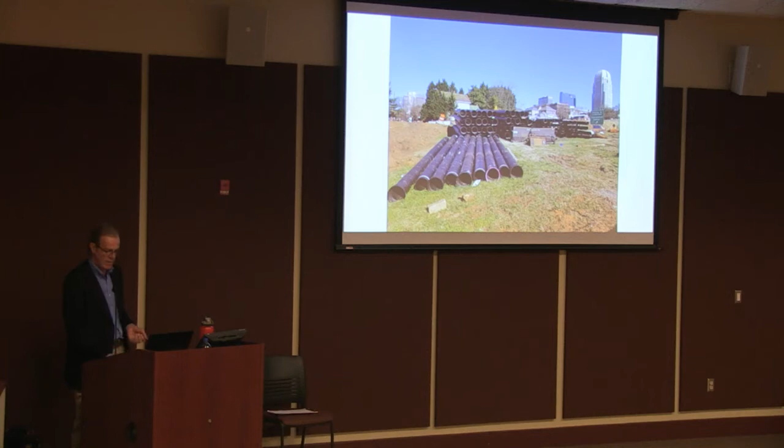So, I love this. Any questions? Who in Winston-Salem's got their head in the sand? I'm not going to name names. I have several questions. Sure.

One about the finite quantity of water. So I think I heard you say that the water that's in the Earth's atmosphere, plus what's on the ground and underground, is the same as it was 4 billion years ago? Yeah, we have the same amount of water on the planet as there was 4 billion years ago.

Okay, the polyethylene pipe, the primary source of raw material that goes into that, is it not oil? Yes, it's petroleum-based. So that contributes to your earlier comments about global warming if we're producing more oil to make the polyethylene pipe, correct? The oil that we produce to make plastic, any plastic—

isn't part of the pollution problem. It's burning it that is. The internal combustion engine or diesel engines were burning fuel, oil-based fuel, fossil fuels. So with polyethylene pipe, yes, there's going to be some energy, a lot of energy really, heat energy mainly,